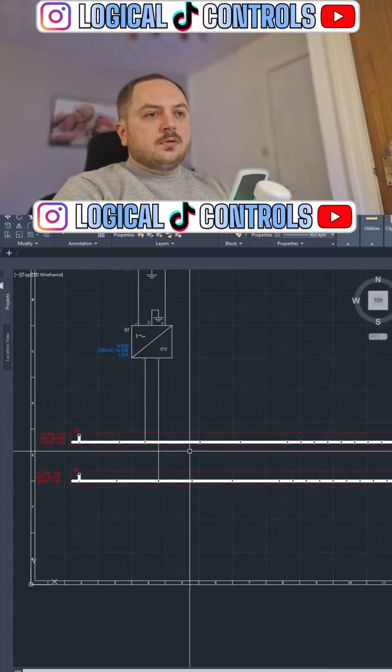You know the software, you're an electrician, but you're wondering what's the drawing for. I'm just really gonna show AutoCAD Electrical, really. The bits that are already there were when I was gonna draw up my test rigs that I've got. I never ended up doing it in the end, but this is what remains, really. So I was just gonna show some stuff, if you're interested.

What's the difference between TinyCAD and AutoCAD? I'm not sure, to be fair, Bubbles. I've never used TinyCAD. This is a special subset of AutoCAD called AutoCAD Electrical, so it's tailored for making panels and that sort of thing.

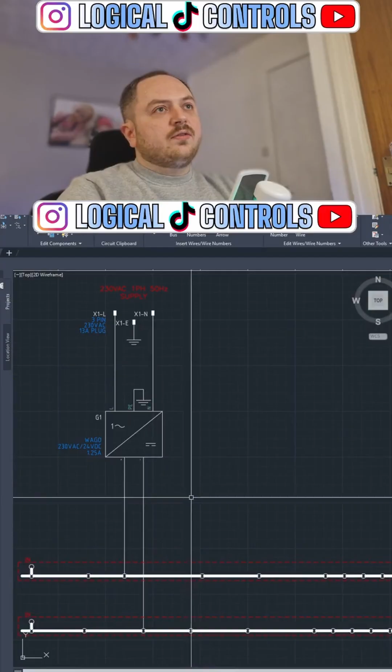Oh, you were working, yeah. It's a nightmare when it's like that, isn't it? All from the 80s. A P2000. What's one of them? I'm not sure what a P2000 is, Pickle. Did you have drawings, though? That's the most important thing. Well, I guess if you ain't got wire numbers and no labels and nothing, drawings are probably no good. Yeah, it's tough work. But that's where you earn your cash, in here. That's where you earn the money.

Automation Direct. Okay. Yeah, we don't really have that over here. I don't know if it was you I was saying it to or someone else, but I was looking to get a Click PLC one time, but they're just not a thing over in the UK. Earth the 0 volts. On the DC side, you mean? Yeah, I probably would. If I was doing a job, I would ground the battery negative. Yeah, it's probably the best way, mate. I'm in the UK, buddy. Them shipping costs would be expensive, mate.

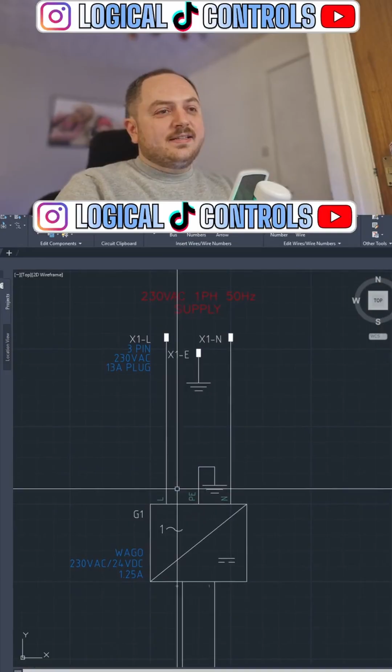Yeah, I know what you're saying, Powelly. I tend to work in power generation, so the battery negative is always connected to the engine chassis and stuff anyway. You always ground all that side.

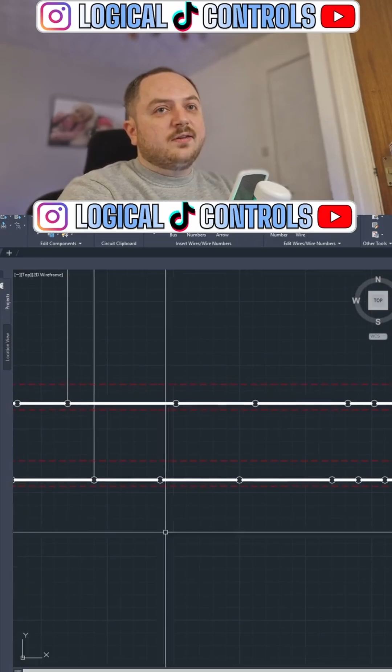High voltage. Yeah, man. I used to test industrial battery chargers, and sometimes the charger would have a floating output, and that was actually quite safe when you were doing the testing because you could have one fault and nothing would happen. If the negative faulted to the chassis or the positive faulted to the chassis, it didn't really matter because it was a floating system. But if you had two faults, if both faulted to the chassis, then you'd obviously have a short circuit.

Right, let me just start wiring in some stuff. How I would normally do it is, there's my positive. All my terminals are not aligned with the grid, and that really annoys me. Is that aligned now? I think it is, yeah. Let's move that one over. There we go. I like to try and keep my positives on the left, my negatives on the right. Try and keep some consistency across the drawings.

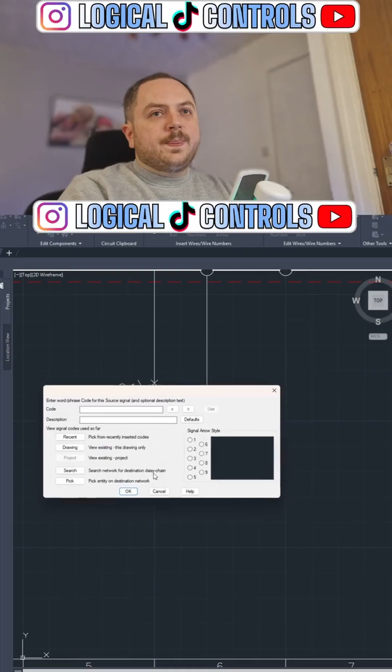Have you ever worked on larger scale buildings? Is that what you meant to say? No, I tend to do just the control panel side, but sometimes we might have like 20 control panels in a suite of the control systems, like a suite of panels. So I don't do buildings or anything like that though. It's usually control panels for like generators and stuff like that. Yeah, no worries, mate.

I want another source. Let's call this one negative. You can kind of call it what you want. I'll just show you what the source arrows can do in AutoCAD. So this won't really make sense to do this. In reality, you would normally do it across 2 different drawings, but I can draw some lines up here. You see that alright? Yeah.

And then I can put some destination arrows in rather than source arrows. And if I call that one positive, and call that one negative, and it depends how you've set out how you want your drawings to be numbered and stuff. But you see now those arrows automatically point up here. So if I put some wire numbers, let's say if I put the number 6 on there, so that's now got the wire number 6. If I update this destination arrow, that also has the number 6.

Oh, you haven't got that far yet. Oh, fair enough, mate. Fair enough.

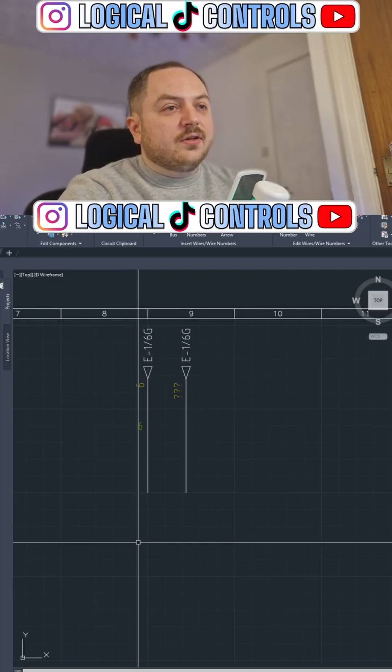Have you worked in anything related to GNC, AOCS control in spacecraft? No, mate, that sounds way above my pay grade. No, I haven't, buddy. Is that what you do? I used to be an electrical engineer, but now I'm morbidly obese and I live on a dirty mattress. I mean, days can get better, buddy. Get back into it.

I want to move from the USA to England. Is it worth it for controls? No, I would say you definitely get paid more in the US, mate. Just from what I see on TikTok and stuff. It sounds like you guys over there get paid way more.

Anyway, let me not just have you staring at a static screen. Let's put in some relays or something. What do we want to do? Let's bring in some coils. How do I want to do this? Let's put it here. Just leave it as K1 and leave it unlabeled for now. So I kind of showed this as an example, but it's not a very good example. We would normally, in the UK or Europe at least, do our rails horizontally rather than vertically.

So if I just delete that off, you guys can see that okay. Yeah, put my rail there for the positive, scoot that along, chuck that up there. Excuse me. That's negative, I know that one.

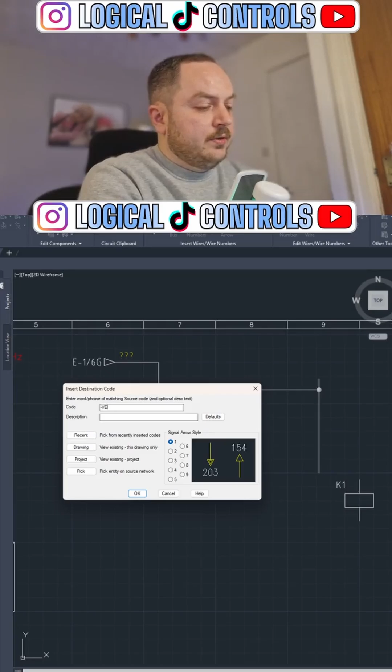70 plus pumps, wow. Savage, the engineer, savage. What was your pathway to becoming an EE? So I did an electrical apprenticeship at a local manufacturing company. That was a 5-year-long apprenticeship where I worked on the tools 4 days a week and went to college and university and stuff 1 day a week.

What's this panel for again? There is no real reason for this panel.

I was explaining at the start that I had basically a power supply and a couple of distribution blocks already drawn up, and that was because I was gonna do some drawings for my test rigs that I've got. I never ended up doing it in the end, so yeah, there's no real tangible reason for doing this. I just wanted to show off AutoCAD Electrical. I showed the 3D modelling side last night, that went down pretty well, so I thought I'd do the electrical side, the schematic side, tonight. It's only going to be a quick one.

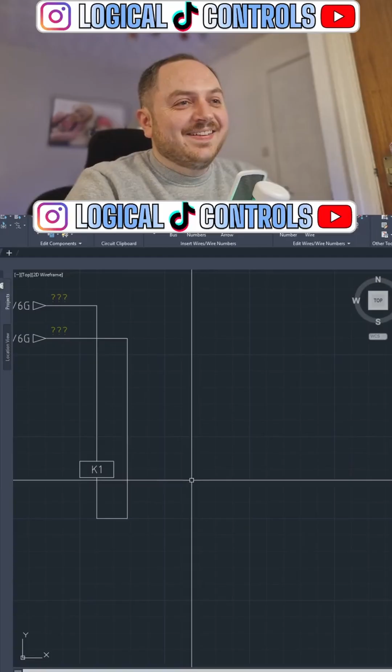Is it like a formation in autumn? I don't know what that means. Sorry, MN, I'm not sure what you're asking there. Air conditioning system, maybe I've missed something. Just let it burn. AC control, maybe I missed something. Desvad, welcome back. Anyway, mate, welcome back again.

I built panels for my father when I was 13, that's how I got into controls. Ah, nice, what sort of panels were you building? What sort of industry did you work in?

I don't know how much you guys can see of this screen. Yeah, you can see a little bit. So, how I would normally do my circuits is I'd normally have like a DC rail, which is what this is, so just ignore this down here, that was just there already really. But so these arrows point to these arrows up here, you see that number 6? That is this number 6 here. So it all automatically sorts itself out when I put the arrows in.

I could give this one a wire number as well. Let's give that number 2. Let's change the number 6 to a number 1, just so it's how I would usually have it. Positives 1, negatives 2, and then if I update that and update that, you can see it goes to 1 and 2.

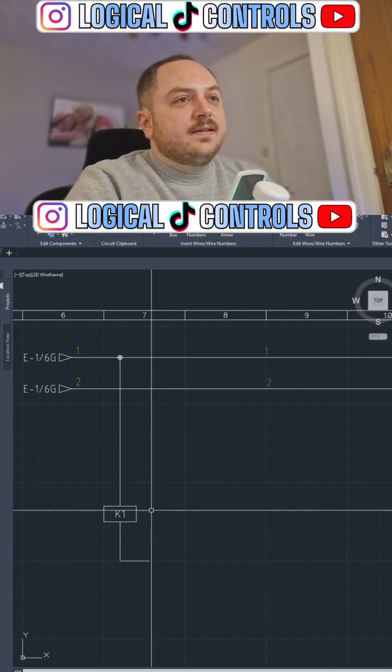Just found you, bro, can't wait to dive into your catalogue. Yeah man, I've got a lot of videos up there, you'll be there a long time, but thank you brother, I really appreciate that. Where are you in the UK? North Yorkshire, mate, North Yorkshire.

One line above, one line above, and one under. I have no idea what you're talking about there, buddy. Just pure automation drives, pneumatic valves, servos. There's probably some conversations going on that I'm not sure about. AutoCAD Electrical, yes mate, that's what it is.

Okay, so I've got a relay on there. I mean, it looks odd, but you could probably do this and have this as like a DC supply healthy relay, and with the relays I use, that's normally 8 and 1 on the coil. So these numbers down here are the coil numbers, and then up here is where you select the contacts. Normally I would use that, don't remember the pin numbers off the top of my head, I normally just copy and paste them across.

But just for the sake of this, I will say we have a 3 is a changeover contact. Let's call them 11 and 12. No, sorry, 11, 14 and 12, because the order is common, normally open, normally closed. And then put colon in, 3, 21, 24 and 22. Don't know why I struggled with that there, but yeah. The actual relays that I use aren't like that, to be fair.

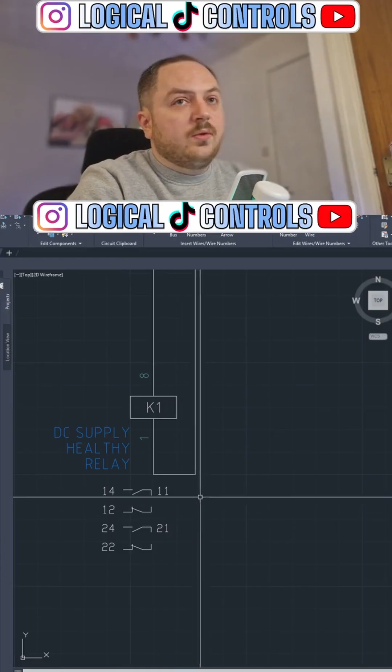Why have I only got 1? Have I done something wrong? 3, 21, 24, 22, not sure. It should show 2. Oh, there we go, it's showing 2 now. So these are what's called a cross-reference. So if I put a contact in, it's going to automatically fill in where that contact is, on which drawing and which grid number. See, like there's a grid, so if you're ever looking for the contacts of that K1 coil, it will tell you down here.

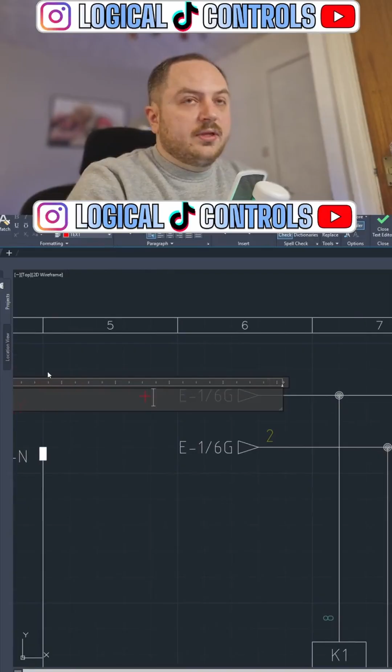In German drawing schematics like that, plus is above, minus is under. Normally I'd only use these arrows when going to a different drawing, but rather than chopping and changing between drawings, I'll show you on the same one. I'd always label which one's which - a label saying positive and negative. So even though it's on the same drawing, you can clearly see number 1 is the positive and number 2 is the negative. I always try to label it so whichever drawing you're looking at, you know which rail is which.

Do you design circuits for the public? I'm not sure what you mean by that, mate. I work for a company - we design control panels. They're not really for the public, I guess, they're for our clients.

Good software - are you building any specific circuit or just showing the process? No, I'm just showing the process, wide angle guy. I'm not building anything specific.

Right, okay, so there's our DC healthy relay. What we could do using that relay is take a line down. I can open up my components - I'll just pull it over here because there's some stuff I'd rather not show.

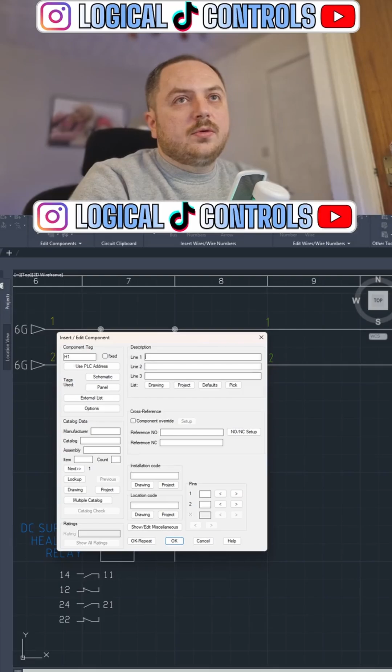Pilot lights, standard lights - let's have a nice white light. So what we can say is this is the DC healthy lamp. Normally has the terminals of X1 and X2. Let's scoot it up a little bit.

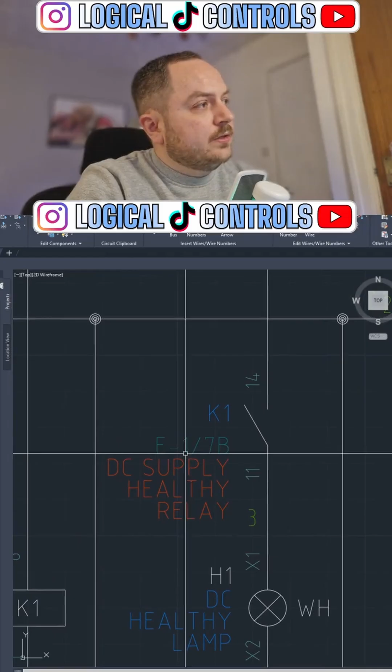It's also got the cross reference of where the coil is, in green - I think you guys can see that, yep. That's where the coil can be found. And on the other end, when you're looking at the coil, if you want to find the contact, that's here. You can see where the E1 is next to the 11 and 14 - that's telling you the normally open contact is at this destination.

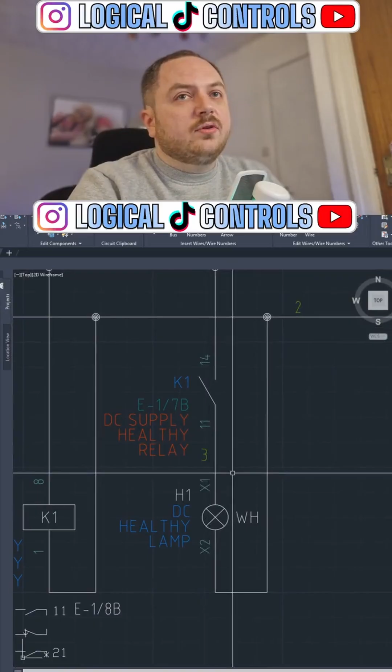Also, when I put the contact in, you might notice there's a number 3 here - it automatically put a wire number in for that, the bit in between. So yeah, that's pretty good.

SEE Electrical is good, I tried SEE Electrical, I couldn't get on with it, I didn't like it. It also failed on the first project where we trialed it. Our customer wanted our drawings, so we sent them - they had SEE Electrical, but it turned out they had SEE Electrical Professional or something like that, and we just had normal SEE Electrical, and the two weren't compatible.

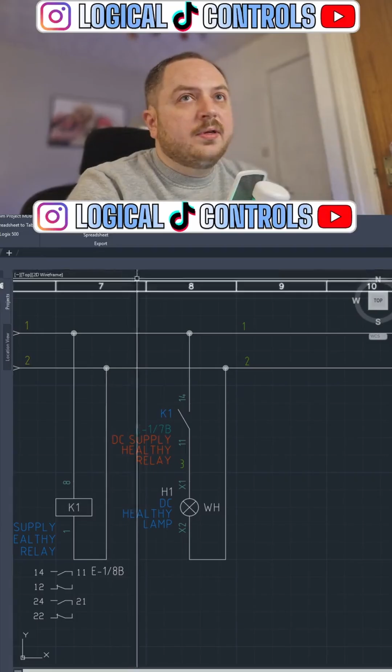How do you import a PLC in AutoCAD? There are ways of doing it, though I can't really show you since my ribbon isn't visible. You can do it from an Excel spreadsheet for certain PLC types, or from Unity Pro, an old Schneider software, or RS Logix 500. A lot of these are old, but you can import add-ons in AutoCAD to do that.

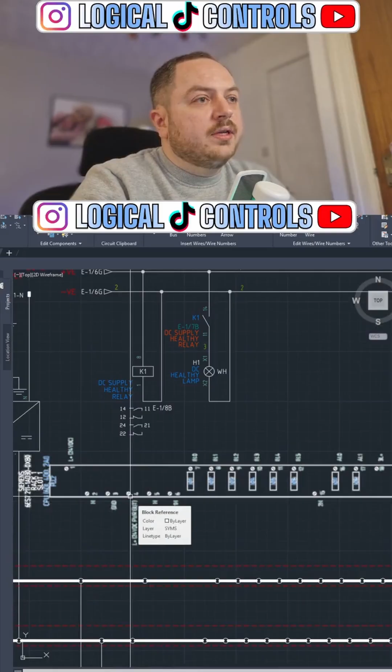Probably missed some stuff - how do you go about remote VPN access to a PLC? I used to work on roller coaster control systems, and I'm doing that at the moment actually. I've got a project where I'm using a Teltonika unit, a RUT 956. It's pretty good, I'm quite happy with how it's working.

Just build your own isometric PLC - you could do that, but then you're kind of getting around the point. The whole purpose of doing it like this is to use AutoCAD Electrical's inbuilt functions, so it's all kind of intelligent. If I was to just draw it out, it's kind of pointless being in AutoCAD Electrical at that point, I'd say.

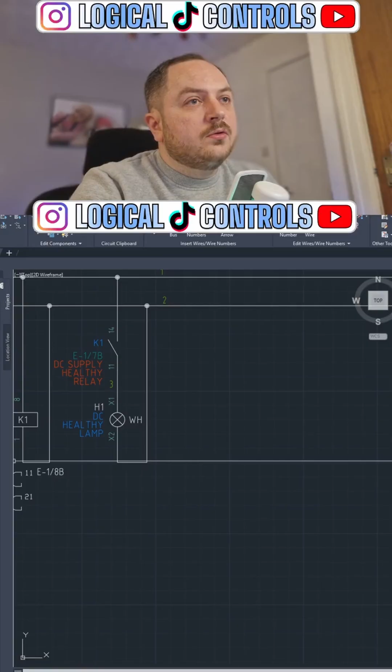VPN access was a risky topic. Yeah, I mean, if you get a device that's got all the cybersecurity stuff built in, then you should be golden, really. I used the Teltonika, but stopped using the RMS VPN. Oh, that's what I've been using. Yeah, the RMS VPN stuff. It was pretty straightforward to set up. I'm quite happy with it. It didn't cost a lot whatsoever for like 10 years, like a management pack thing. It would also flag an input on the PLC.

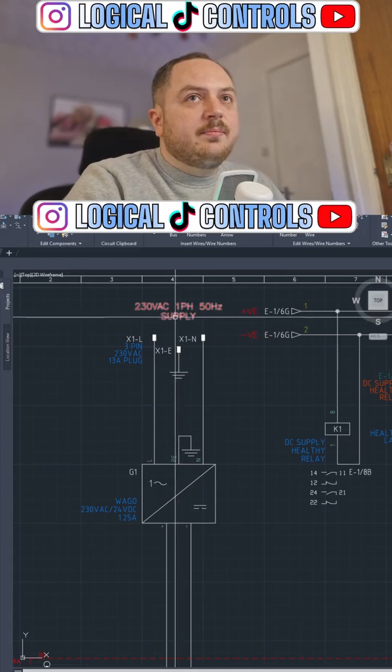So we've put in a relay. Right, okay, let's go back to basics. We've got an AC input. Single phase in the UK, the supply at the wall is 230 volts, 50 hertz. That comes into a power supply. It says it's a Wago or Vago, however you want to pronounce it. 230 volt to 24 volt DC, 1.25 amp. I picked that just because that was what was going to be on my test rig.

It then comes down to a couple of distribution blocks. Normally I wouldn't have green and white. I would have something like orange and white, but I don't have an orange one. I have a green one, so that's what it's going to be. These distribution blocks, they're a Phoenix distribution block. They're really good. 19-way, 24 amp. Brilliant for just distributing some DC about.

We come then down into a circuit breaker rated at 4 amps. That then goes off into these source arrows. Those source arrows come out up here and then go into a relay, which is my DC supply healthy relay. That then goes to a lamp. So if that relay is energized, that contact's closed, that lamp's turned on. That's all we've got to so far.

Hey bud, I'm about to create a coil winding machine. Would you recommend this tech for this? I wouldn't say go out and get it unless you're doing control panels or anything electrical, because this software isn't just for control panels, you can do anything with it really. I would say if you're not using it already, don't go out and get it just for one job. Go out and get it if you're going to do tons of panels or tons of machines. Don't just get it for one project because it's really expensive.

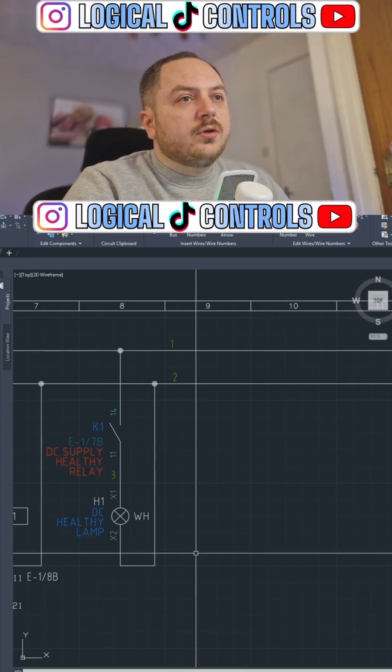Powering the modem would flag a PLC input, thus logging that VPN is possible. Ah, I'm with you. Sorry, right, I'm with you. Okay, mate. When active, the manufacturer takes no responsibility for the loss of life on the ride. That's wild. I don't think that's going to hold up in court, mate.

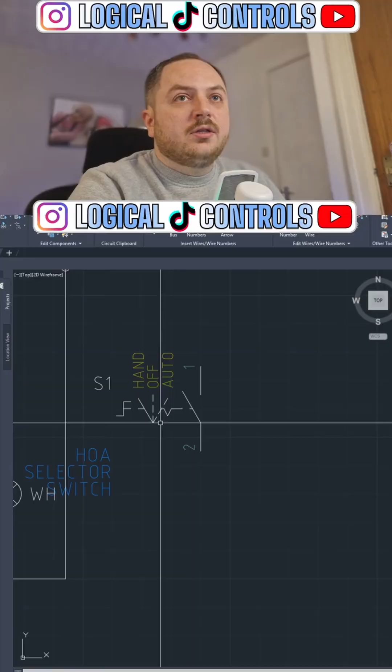Positions: hand, off, auto. What that does is it gives you a little visual representation of what that switch is. So the left hand position would be hand, the middle would be off, and the right would be auto. It's been given the designation of S1, and it's got a little bit of a description here, which I can just shift across. The descriptions are never really where I want them. It's typical. And I can put that there.

Then if I need my other contacts, which I do want, I'll pull that over here. Selector switches. Second contact normally open. Put that one there. I'll just copy that across. And then there's a little button where I can click that one and that one, and it'll give me a nice little line in between. I can make that 11 and... In fact, I've just realised I put 1 and 2, I think. It should be 1 and 4.

In fact, it wants to be 11 and 14.

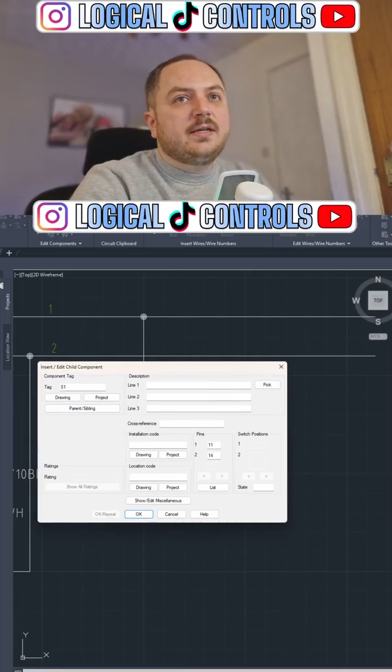I'm getting distracted, sorry. Do you train? As in, do I teach and stuff like that? I don't, no. I just do this for the fun of it, because I'm a boring bastard. Yeah, I don't do any formal teaching or stuff like that. I don't want the hassle of it.

You guys can see that, okay? Right, so there's my selector switch. There's my contacts on my selector switch. I can then bring that down to, again, some relays or something. I don't really need a contact in the middle. Probably don't need to use that. Let's bring in... I tend to just copy and paste, because once I've set it up how I kind of want it, then I don't need to start messing around again. Oh, I've missed out there.

I'll tell you what as well, I shouldn't have the gripper on. Just so you know what I'm talking about, you can see there's like a little green, it almost looks like an egg timer where my mouse is. And if I go to the end, it'll turn to a square. You don't really want that on when you're working with AutoCAD Electrical, because AutoCAD Electrical is meant to be used with like a grid type thing. So yeah, don't put the snapping. I can't remember what the official name is, but I call it the snap. I think it is object snap or something.

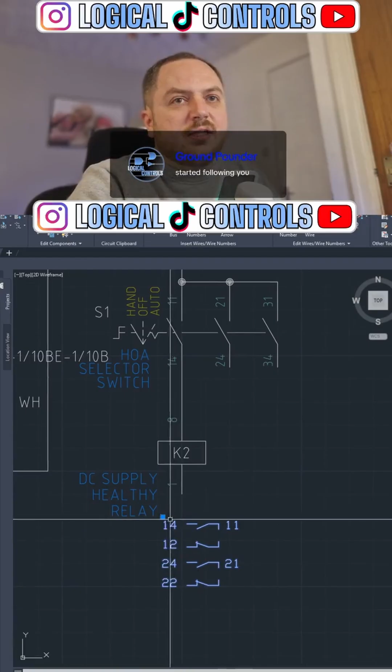Really appreciate that. Grew up watching my dad draw these on an easel. I feel like I'm so lucky to live in a time where I don't have to hand draw, because I know for a fact, with the amount of mistakes I make in AutoCAD Electrical, and it's so easy to fix. If I was to do it by hand, I don't think I would be in the industry long. I'd have thrown the big drawing boards out the window long before I did anything useful. Because them guys had to, like, yeah. If you made too many mistakes, you almost have to start again completely from scratch.

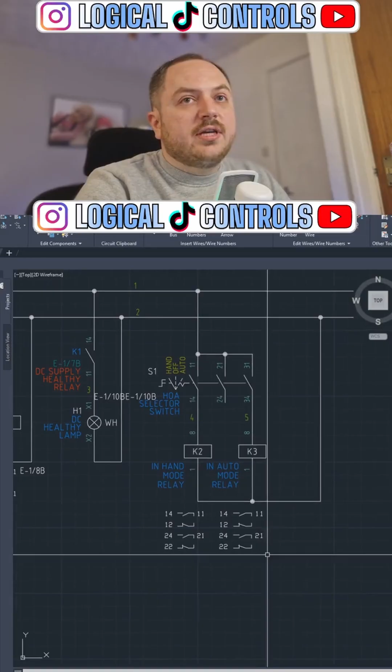So there's another wire that needs a number. Just click on that, it gives it the number 5. That one also needs its name changing. So this is in hand mode relay. And I tend to just try and stick with 2-pole relays. They're quite small. The ones I use are Omron G2R2 relays. I try and use them for everything. But if I need some bigger current, there's like a G2R1 which does 10 amps. These are 2-pole 5 amp relays. So there's that.

What else can I show? Let's go into another circuit now. I don't know what's going on with that cross-reference. I think it's because I just need to pull that off. Let's just cancel that. Take that out. Hopefully that should get rid of... Yeah, that got rid of the cross-reference. Let's go into another drawing. So, not destination. I want a source.

You're using AutoCAD? I am, buddy. Yes, I am, DJ. Let's call this +2 because the last one was +1. In fact, let's put a dash in there. You can kind of name these whatever you want. It really doesn't matter as long as the other side's named the same. Yeah, this is just how I do it. +2, -2, whatever. So that's now pointing off to somewhere, but I haven't done the other end yet.

And if I go into a different drawing, so this is a totally blank drawing, I can now do, let's do a multiple bus this time. So up until now, I've been individually putting the wires on. You can put multiple wires on at the same time.

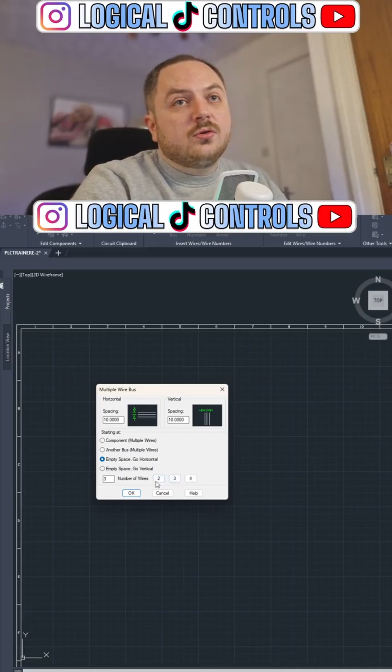Really appreciate that. I want an empty space, go horizontal. I just want 2 wires. You could do like tons of wires if you wanted. I will set it there, and I think you guys can see that I've just made a 2-wire bus, put some destination arrows in, call this --2, and you see that's now, in fact that's positive because it's on the top, my bad.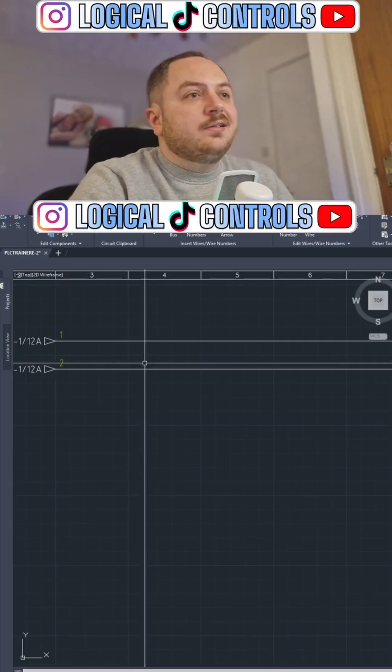What shall we do? The thing is, I'm not really designing anything as such. I'm just trying to show you how the software works. Let's pull this down. Let's say if we are in hand mode. So what I want to do is bring a contact in and, before I do that, what I did last time to link the contacts to the coils was parent sibling, but that's only good if the coil's on the same drawing. We're now on a different drawing. We're on E2 instead of E1.

So now what I need to do is go on project, and project will list every relay coil you have. So what I want to do is just pick the one that I want for this contact, which is in hand mode. Hopefully you guys can see that okay. And I pick that, and it brings in all the details like it did before. It brings in the tag number of the coil, the location of the coil, and the description of the coil. So if I went back to E1, they were a bit close, but you can see this cross-reference is updated. So that's now telling me where the normally open contact is.

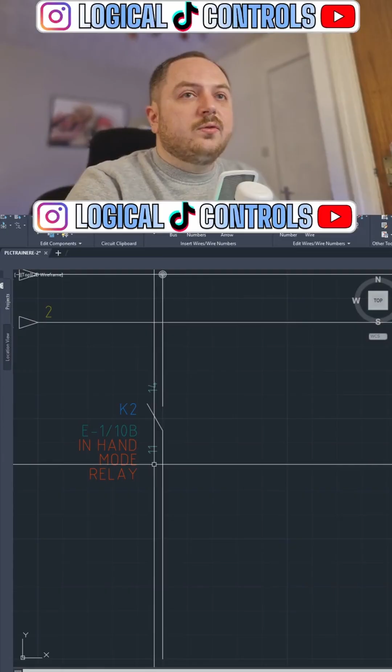Yeah, and that's it really. So this is all automatic in the background. I'm not having to do anything. I'm not having to manually cross-reference, because manual cross-referencing, I don't know if any of you have done that, but it's a total nightmare, especially if you need to modify the panel or modify the drawings in any way after they're done. Having to update the cross-referencing manually is crazy hard. It's more of a pain than hard.

How do you create a bespoke drawing border? That's a whole different topic. There's a whole load that goes into that. It's called a title block. Have a Google if you're looking to do your own. Yeah, look into title blocks.

Is this free software or subscription? This is subscription-based software, AutoCAD. I don't think you can buy it outright anymore. I'm not sure on that, but nowadays they're pushing for subscriptions, and it's like a couple of thousand dollars a year. It's pretty expensive. Which one is better, ePlan or AutoCAD Electrical? I haven't used ePlan, mate, so I'm not sure, to be fair.

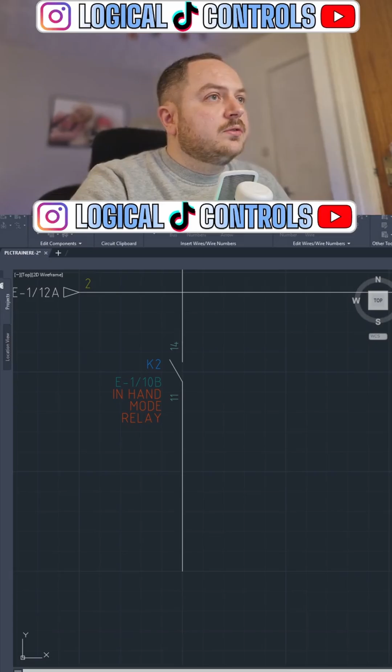Okay, so if we're in hand mode, I'm going to do a little circuit. This is an enabler for my hand circuit, for my manual circuit. So I'm going to put some push buttons in. Let me just pull that over here a second, find my push buttons. Push buttons, normally open. I don't know if we've got any guys from outside Europe here, but these symbols that I'm using are IEC symbols rather than NEMA symbols, so that's why they might look a little bit different for you.

I'm going to call this my start button. Let's put it there. Start button. Give that 11 and 14. And what I've kind of glossed over is you can put all the manufacturer data in. You don't even have to put it in. There's a database already that comes with AutoCAD where you can pick a particular type of button. It's got all different manufacturers: Eaton, ABB, Schneider, all the others.

And you can give it data. I won't do that on this stream because it's unnecessary, but you can do all that, and then it can give you a bill of materials at the end. So when you finish all your drawings, you can create a report, and it will give you every component that you've used in that panel, or that machine, whatever you're designing. And then you could take that and go and order parts and stuff like that.

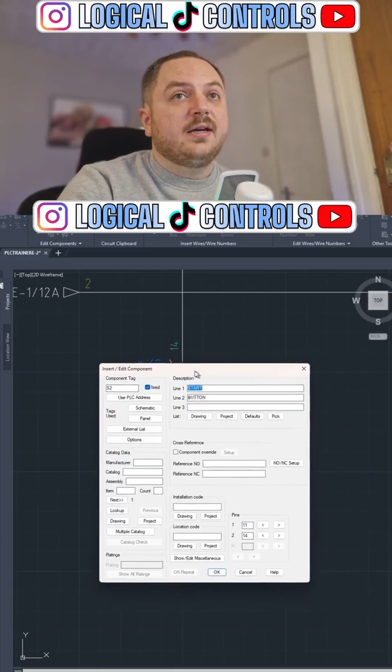If you're a student or have access to a student email, you can access Autodesk products. Worth a look. That's right, Alex, thank you for reminding me of that. I did mention that last night. If you have a student email, you can get access to AutoCAD. I did it myself when I was a student. I think at the time they would give you access to basically any AutoCAD product for 3 years. I don't know if it's still like that now, but I think it's something similar.

ePlan has its own advantage. Yeah, I think ePlan, as far as I'm aware, is just as good, if not better, than AutoCAD Electrical. It seems to be the way a lot of people in the industry are going.

So there's my start button. I also want a stop button. Let's make that normally closed. Push buttons. Normally there would be images on all those components that you've seen on that list. For whatever reason, my installation has decided not to bring those in. I think it's something to do with the database that I've got in the background. It is what it is. I know where most stuff is anyway. So this is my stop button.

If I could spell, which I obviously can't. There we go. Let's call that 1112. Start button, stop button. Oh, let's bring that up.

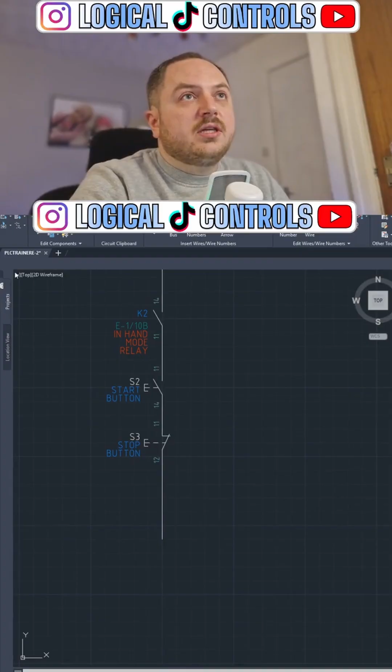Let's add another. In fact, let's put a contactor in this time. So, relays. In fact, it's not. It's called motor control. There we go. Motor control. Motor starter, they're called, and a coil. Let's leave this as K4. Normally, actually, I don't call stuff K1, K2, K3, K4, because sometimes I just don't find it very intuitive if you're looking at a circuit.

So if I was doing, I don't know, a pump run contactor or something, I'd call it PRC. Yeah, that's how I tend to actually label. But I'll just leave it as K4 for now, just for the purposes of the stream. Let's call this motor run contactor or something. And the coil is normally A1 and A2 on a contactor.

And we would have, let's say it's a 3-pole contactor. We've got 3 normally open contacts. I think normally open is a 1. It is. We'll call that 1 and 2, which is normally what it is. 1, 3 and 4. And, in fact it's not the final one, but 1, 5 and 6. And then lastly, you normally get an auxiliary, so that'd be 1, 11 and 14.

Again, like I say, if you've selected a manufacturer and stuff for your contactor or your relay, it pre-fills all this in for you. You don't have to do all this because it's got the data in the background in the database. So I'm just doing it because I haven't filled all that in. And then with those numbers I just typed in, it now knows what the contacts are. So it's a 3-pole contactor with 1 auxiliary normally open contact.

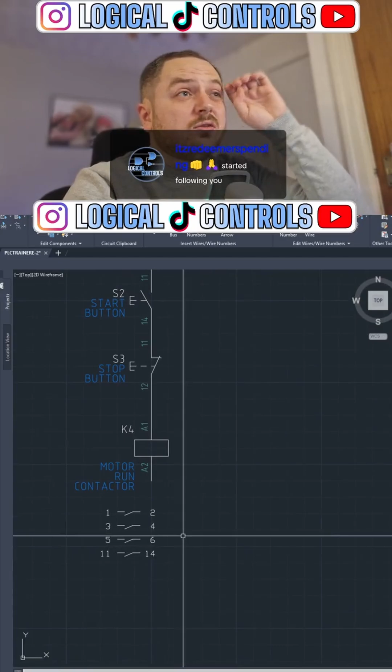Okay, so there's in auto mode, start button, stop button, but as well as that, I want a latch for that contactor. And because it's the same drawing, I can just do parent sibling. It's telling me you've copied a relay contact, but this is a contactor coil. You need to change the database name in the background, the type of contact it is, which is fine. I'm doing things a bit fast. Sorry guys, I'll slow down.

When that contact came in there, it came in with a pin number of 1 and 2, but 1 and 2 is one of the main poles, and I don't want to use the main pole for doing the latch. I want to use the auxiliary contact. So because I already put in the data of the contacts, it already knows what numbers are what. I can click list here, and it gives me a list of what contacts are available for that contactor. So I want 11 and 14 because that's the auxiliary contact. And for whatever reason, I've got object snap on again. It keeps coming on. Turn that off.

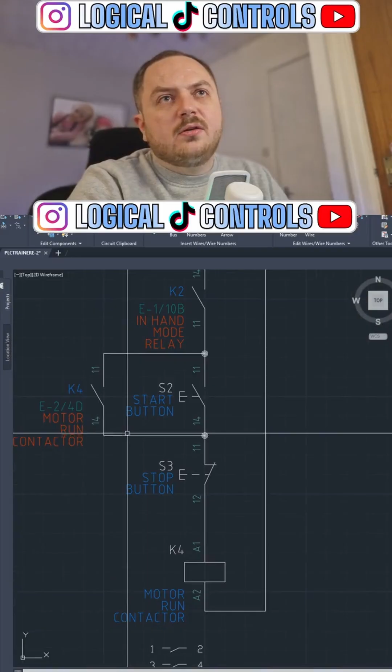Right, so there we go. Put that over there. Put that over there. And there's my latch. Kind of looks a bit funny. I think I've gone a bit too high there. Let me scoot that down one. There we go. Okay, so there's basically our manual start circuit.

It hasn't got any wire numbers yet, so I've got two choices. I can either do a project wide, add wire numbers, or I can select the wires that I want numbers to. Just for the sake of it, I'll do project wide. Sequential. Let's just go for it. Do all.

Save. Okay, I don't normally do this, I normally pick them individually. But there you go, it's added some numbers. The reason I normally do it individually is because they're not the right numbers, they're not sequential to what I did last. They were new numbers because this is a new circuit, it's added a 1 to the front of the number. So let me just do it individually, I prefer to do it that way anyway.

And again, it's done it a bit weird. Why is that? Everything's gone Pete Tong. What's happened here? Let me close. There we go. Oh no, it is, we're up to... I didn't realise we're up to wire 11. Okay, never mind, ignore me.

Hopefully everyone's following along. If you're not following along, just ask a question.

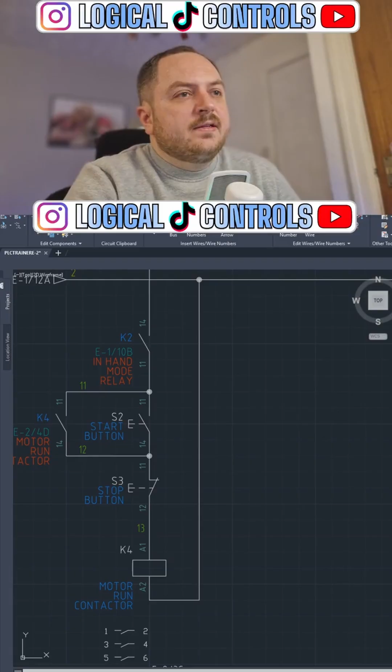Is this similar to ETAP? I don't think so, I've not used ETAP, but I think that's more for like calculations and stuff like that. Am I not right in thinking that's for calculations? That doesn't look like Xilinx, that is. You are correct in saying it doesn't look like Xilinx, because it isn't.

Why not the stop button at the beginning? I know a lot of people are taught to do it that way, but it doesn't matter whatsoever. I don't like doing it that way personally, that's just my personal preference. I like all the triggers for starting, like latching up or starting a circuit, to be at the front, and I like all the ones that basically break that in a chain afterwards. That's just my personal preference. I remember when I was at college and university, everyone always said put the stops at the start, but yeah, I'm not a fan of it.

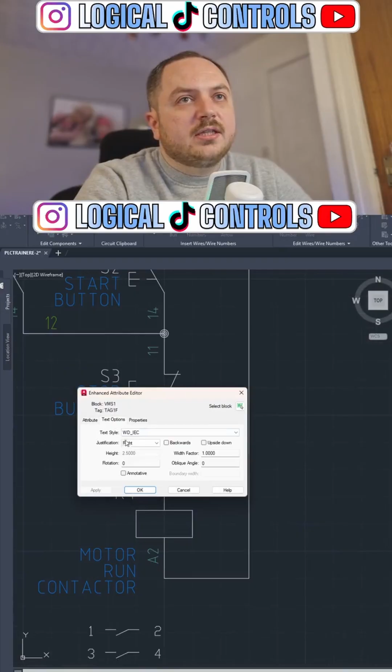Yeah, so that's my... I like to also put the tags of the coils inside the coil. So I'll align the text to middle center, and then I'll just snap it into the middle. So I like to have the tag of it inside.

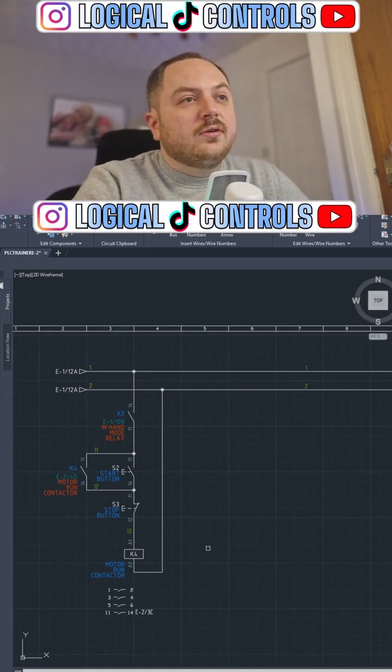John Spathgate - I feel like I recognise that name. Maybe that was the guy that showed us it. That might have been, I feel like it is, because it's quite a unique surname. I think that was the guy who showed us.

What's better? I personally prefer this, but like I say, that did definitely have cool features, but you had to pay 3 times more to unlock everything.

Do you do anything with Allen Bradley? I don't, to be fair, mate. We build panels for a particular customer who uses Allen Bradley, but we don't program them. It's a bit of a strange arrangement we've got - we don't do that with many customers. We don't just do panel builds, we tend to program whatever we build and design. These guys get us to do the design and the build, but then they'll program it. It works out pretty well, but they use Allen Bradley - I wouldn't do it by choice. Did you ever use SolidWorks Electrical?

No, but my last company where I worked, they were going to move on to that. So we used just normal AutoCAD, generic AutoCAD, not AutoCAD Electrical there. But they used SolidWorks for the 3D modelling and stuff, so then we were going to shift over to SolidWorks Electrical, but I'd left before we did any of that.

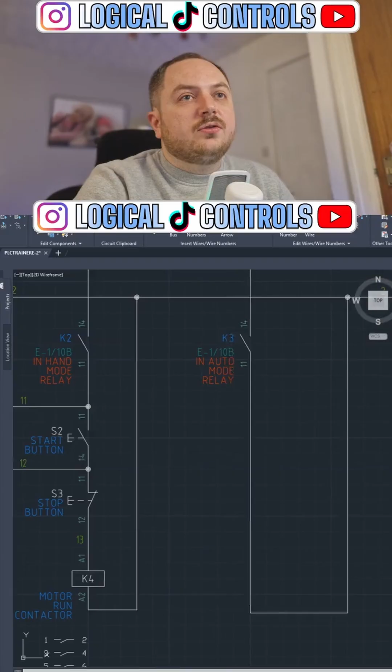Thinking of moving over to AutoCAD - AutoCAD's good, it is good mate. It probably, I say it's good, and I'm showing you - this is a very typical thing. I'm showing you all this stuff that looks cool and looks dead easy. I've been restricted for 10 minutes, I don't know why, I've been moving my screen. I've been showing you it and it looks dead easy, I guess, but I use this every day, so it will take a little while to get used to, I would think.

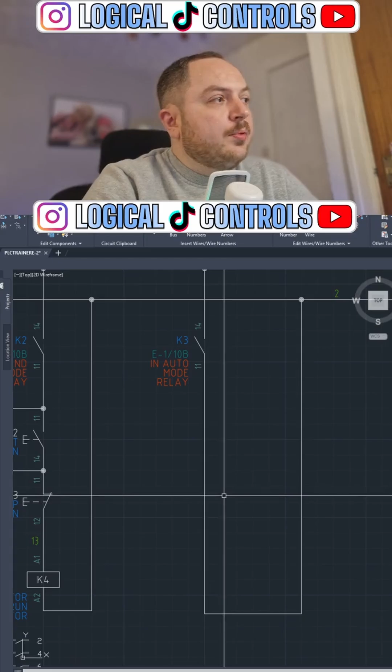Do you do tutorials for complete beginners? I don't, mate, I don't really do tutorials and stuff. I just kind of hop on lives and show whatever I think might be interesting. I'll occasionally do a video, I haven't done a proper video for ages, I need to get back into it. I've just been kind of clipping the lives, really. So no, unfortunately I don't - I just don't really have time for that sort of thing.

I'm a multi-skilled maintenance apprentice, I'm in my 4th year, coming out my time soon. Congratulations, mate, it's a bit of a slog doing your apprenticeship, but you're coming to the light at the end of the tunnel. You'll soon be on the big bucks, hopefully.

Do you build these block templates pre-build? So no, the coils and the switches and the relay contacts and stuff, they're all built in - AutoCAD has its own library. You do have to build stuff though, it doesn't have everything, so you have to build your own on certain things.

I'm getting a dry throat with all this talking. So, just as an example, let me pull something in. Let's try and find something that you might know what it is, because we use a lot of stuff bespoke to my industry. Let me have a look - what have I got?

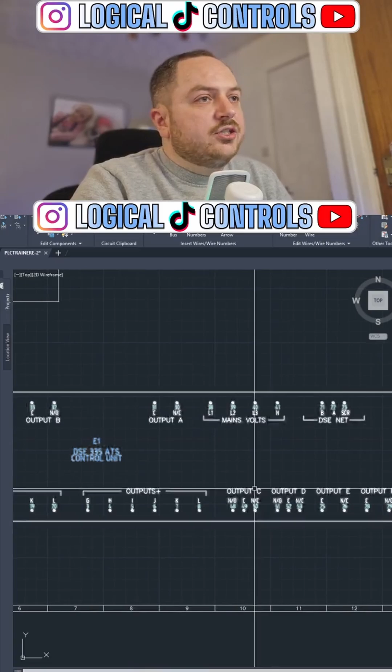None of you will probably know what this is, but this is a block that we've made. This is for a Deep Sea Electronics 335, which is an ATS controller. AutoCAD has no idea what one of them is, so we've had to make it ourselves, assign attributes to it, and basically get it to work within AutoCAD Electrical's automated system. So that's just an example. But this stuff, these are all built in, they come with the program.

Can you generate a parts list? You can, mate. As long as you assign, like I was saying, you might have missed this earlier, you get manufacturer data and catalog and all that stuff. As long as you assign that information, it will tell you how many of them you've used and that sort of thing.

I wonder if I can find something. The thing is, I never do it, so I don't really remember how. There we go, catalog stuff. You just get like, it knows it's a contactor. So you can go through and, yeah, I don't know what I've got installed, to be fair. I've only just got this PC. Maybe it's just Siemens, you can import other manufacturers and that sort of thing. But I can pick one of them, whatever one of them is. I'll click OK. That didn't work as how I thought it would.

Anyway, you can, I've definitely done it in the past. I don't do it a lot. Just kicking off. It's changed a load of stuff, it's made it a... okay, it has updated it. You see, whatever that contactor was that I picked, those are the contacts for it, I guess. Like I say, I don't tend to do it, but if you did do all that, then you can generate a BOM at the end.

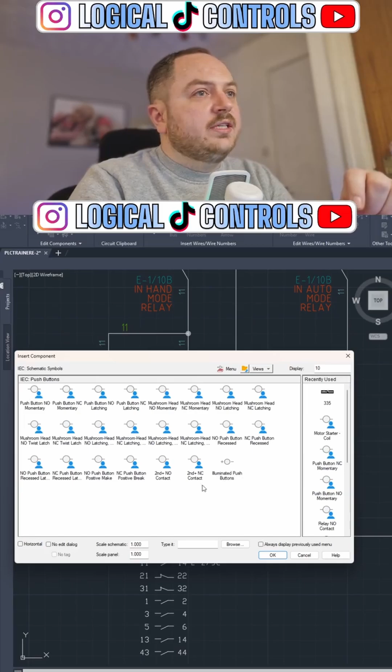Can you program PLC with AutoCAD Electrical? No, mate, no, this is just for design only. You would do your panel design with this software, you wouldn't do any programming or anything.

You know who, thank you. You've already answered him. Trevor, thank you for the follow. I don't know if I missed any others, probably not. Once you get restricted on TikTok, it's mad, you just drop half the viewers in a few minutes.

Each PLC has its own software. Mitsi is mainly used on GX, Siemens on TIA. That's right, RQ, yep, you're right, mate.

I don't use the catalogue because they never have what I'm looking for. No, that's the same with AutoCAD, to be fair. You can download something called a localizer, which will, depending on where you get your AutoCAD from, because normally you get them through a distributor, they'll have a localizer for the UK or Europe or whatever, and it'll have stuff more tailored to what you use, because AutoCAD's obviously an American software. It has a lot of American parts on, and a lot of that stuff just isn't available here.

Does anyone else hate how much Siemens update TIA, so when you're trying to sim you can't? I don't have that problem. I run mine on a VM, and I don't think I have my VM connected to the internet, so I don't have to deal with that problem.

The restriction is ridiculous. What's that in reference to with the engineer?

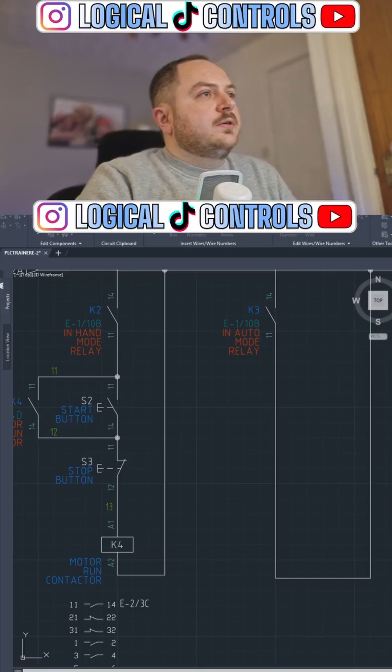Okay, so I know I get started rambling, and then I end up not doing what I'm supposed to be doing. So in auto mode, here you would have, I would take these to terminals or something. Where's my terminals? Wait a second, let me pull it across here. Terminals, there we go. Terminal with wire number, that's what I'm going to put in. So I can put a couple of terminals down, delete that wire out the middle, and basically them terminals is where you'd connect like an external float switch or whatever it is you're controlling.

You might also have another set of terminals for another float or something. What I would do in this case is get my text. Where's my text? I'll copy that across. You guys can see that okay. And I would put here something like 'start float' to let you know that's where the start float needs to be connected across these terminals.

Them terminals don't mean anything at the moment until I put wire numbers in. So I'll put a wire number there, wire number there, wire number. No, in fact, I don't need a wire number there. So across 14 and 15 is where I'd connect the start float. As well as that, with a terminal, I normally give it a tag strip, so I'd call it X1.

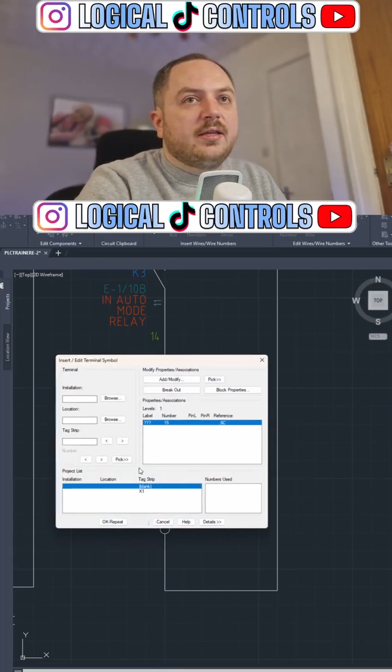And then that way it'd be X1 14, X1 15, and depends how you set up your panel, but then this might be X2 15, and X2 2. And I would say maybe that's where the stop float goes. This is just how I do it. I know other people do it differently. You might draw the contact and stuff like that.

Normally have to bodge a job because TIA won't update. Fair enough. Your live restriction. It's mad, isn't it? It's mad, Kay.

IS barrier. What are you asking him? Good evening, Professor Butler. How are you doing tonight, mate? Did I see that you'd mentioned me in something earlier? I had like a notification at the top of my screen for about 0.5 seconds, and then it disappeared, and I have no notification for it. So I have no idea what you either commented or mentioned or something. I've seen it earlier, but it went.

Is this software free? It's not, mate. No, this is actually quite an expensive software. This is AutoCAD Electrical. I must have turned grid off by accident. Yeah, unfortunately it's not. But an alternative might be SkyCAD or FreeCAD. They're two alternatives that I know of. Let's put that back because that's not good there.

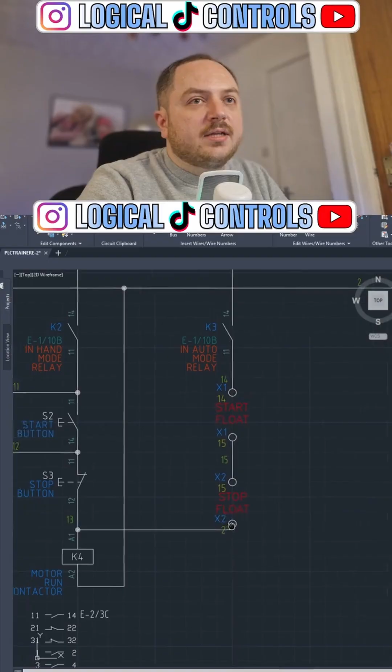You are right though. I do need it. It would need to be latched in some way, but you never know. It could be from like an intelligent device on the tank or something. A lot of tanks, at least a lot I've seen, have little Siemens logos on them and stuff, so it might be latched up in there. But then you wouldn't have a start and stop. So yeah, I'm just kind of making it up on the fly. There's no real thought gone into any of this. I'm kind of more showing the software than anything.

Oh yeah, cheers mate. Sometimes I just don't get notifications. The engineer, you commented on one of my videos the other day. It was can you program it to understand women or something you said. I've replied to that, but on my missus's phone, that reply just isn't there. TikTok's being a little bit weird at the minute. It was funny though. I tagged you in a comment in the video. Yeah, I don't know what's up. When I opened the app up, it was at the top for literally about half a second, and then it disappeared, and I went to my notifications, and it just wasn't there.

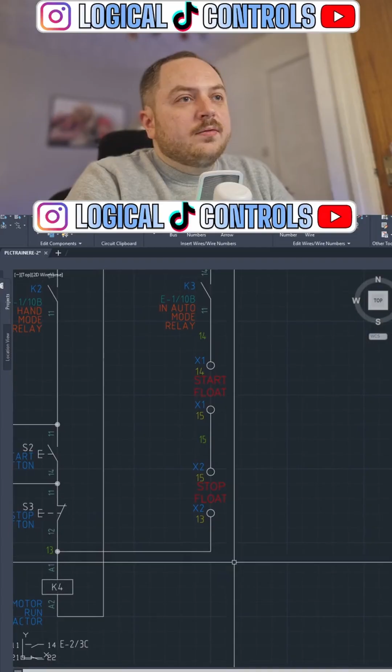AutoCAD is fairly expensive, but if you're a student, you can get it free. Yeah, that's right, RQ. I always forget to mention that. Someone else pointed that out as well earlier.

Oh, you can't see it either. I don't really remember what I said. It was something along the lines of not even God himself could do that or something. Yeah, I don't know. I get no notifications for certain things. I don't know what's going on.

But that comment is a bit weird, yeah. Anyway, let me carry on.

So, this was just an example showing you basically how these arrows work. So, they're the source arrows, they're the destination arrows. These numbers point to where they're going. So, drawing E1, 6G. There was a couple of relays, a lamp, some selector switches, some relays. Then that went across to the next drawing, which was E2, which is this one here. That's where they came in.

I've not labelled them up again, so let me just do that. So that's the positive, that's the negative. That's how I would normally do it. And then you can have the rest of your control circuits or whatever on here. I can bring that in a little bit, tidy it up a little bit. And then you can have this motor on.

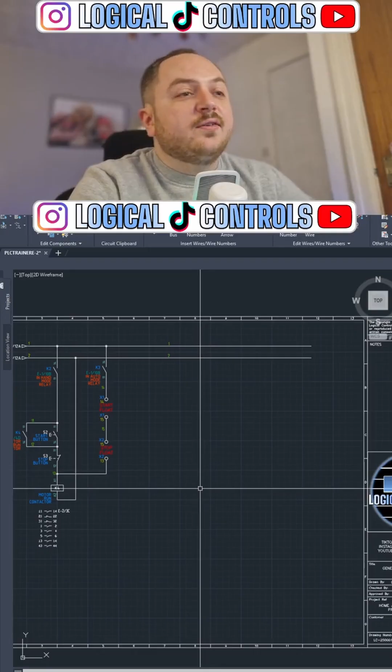Yeah, so... And then, have I got a drawing three? I'm not sure what's on this. Oh, this was just a load of messing around. A load of PLC parts. Let me bin them off. So let's have a drawing 3, and that could be the AC drawing. So, I know we haven't really got much on here, on this drawing. But we could take that then.

So this motor run contactor goes to another drawing. We'll do another multiple bus. This time we'll have 4 wires going horizontal. And then we'll have some terminals on there. Oh, and make them X3 actually as well.

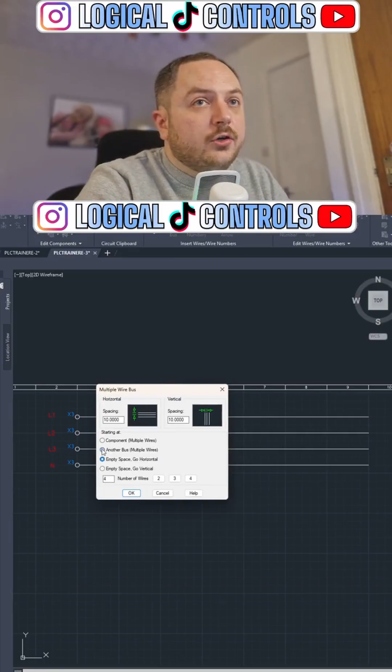Then off here, I can come down with another bus, it's called. And I can just pull that down, and it will pull them all down for me. And then I can put in... I'll bring this over here. Like I say, you would normally see actual symbols in this database thing. I've broke it somehow. Breakers.

And also, one weird thing about AutoCAD Electrical, it doesn't have any 4-pole circuit breakers. It has 3-pole circuit breakers. Let's say that's a 32 amp circuit breaker. And then you kind of just have to copy the last pole across. I want to bin that off, else I'll start getting weird cross references.

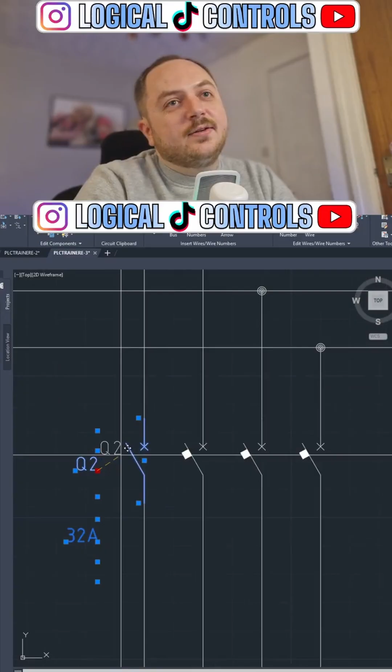Is there any freeware comparable to Allen Bradley that I could learn on? Yes, Codesys. Download Codesys. It's not totally comparable, but it is PLC programming software that is free and you can simulate on. Because Allen Bradley software is pretty expensive, just like Siemens. There are ways and means of getting Siemens software, although it's not recommended. I don't know how else to put that without getting in trouble. But yeah, I would say Codesys is your best bet, mate.

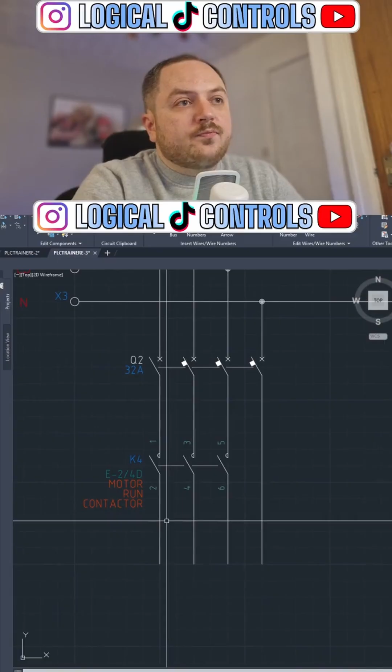We're going to tie that to the motor run contactor. So that should pre-fill all the information in. There we go. From the previous drawing. So now you'll see those contacts have numbers against them. Although it's saying E2. Let me just change that because that's not true. That's E3, that drawing. And now if I update here, oh, it's still not doing it. Hang on a sec.

My E3 drawing was labelled as E2, so it's got itself in a bit of a mess. But if I just re-add them, I think it should sort it out. I had 2 E2 drawings.

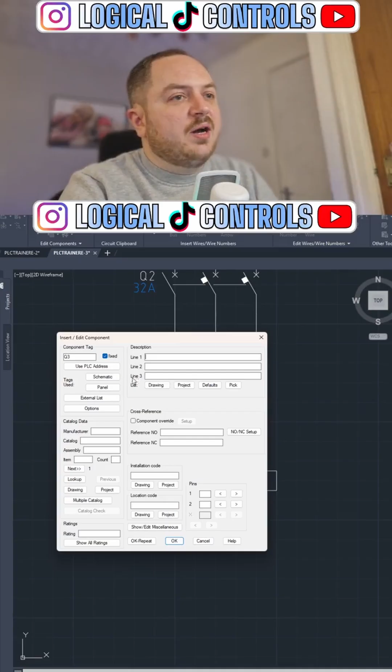Bro, that's beautiful. What's the software name? This is AutoCAD Electrical, mate. Hopefully I've answered a few of your questions there. That was the whole point of the title of the video. The title of this live was "What's the software name?" Because 95% of the time I'm having to repeat the same thing.

I'm gonna call this, I just call it motor overload.

Yeah, we're getting to the end now. I'm getting tired. I'm ready for bed. We've got work in the morning.

And let's take that to a motor. So let me find a motor now. 3-phase motor. Let's just chuck that in. I'll put that there. Just call it, I don't know, fan motor or whatever. I can't even remember what the control circuit was that we're doing now. I can bring that one. In fact, I don't need to do that. I could just extend that wire. And I'll bring that down to... No, wrong way. I want to put that on there. There we go. And put that on there.

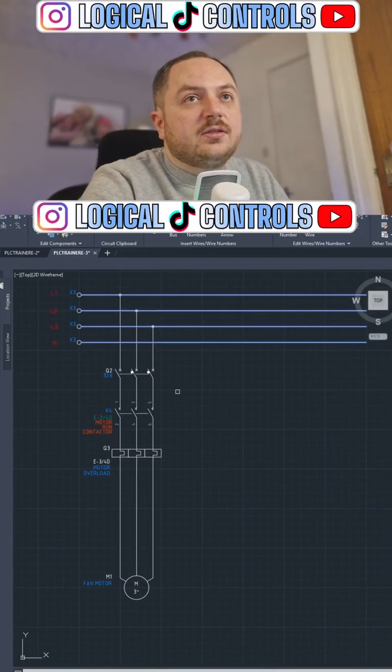We don't have any wire numbers yet, so let's add them quickly. Like I say, I always try and pick individual wires. In fact, this AC itself needs numbers. These need numbers. This bit in between needs numbers. And then this bit needs numbers. Can you all see that? Yep.

Who do you work for? I'm not going to say who I work for, to be fair, mate. I'm sure you're all great guys in here, but the internet could be a strange place. I'd rather just not say who I work for.

So there we go. We've got a load of wire numbers. Where do I find those blocks? This is AutoCAD Electrical. You should find those in AutoCAD Electrical. And let me shift that up. No, I need to join those two wires together. Join those two wires together. And then I can shift the whole lot up so it's a little bit closer.

Had any experience with BMS? Not really, mate. It's not really the thing I'm into. I do interface with BMSs quite often, but I don't do any work with them. A lot of the control panels I do, we provide Modbus TCP registers for BMS controllers.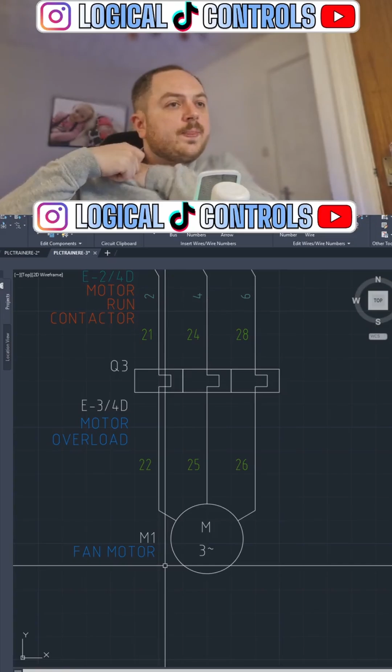AutoCAD Electrical, it is, mate, yes. CAD is the bane of me. It can be. Yeah, I feel your pain. It definitely can be.

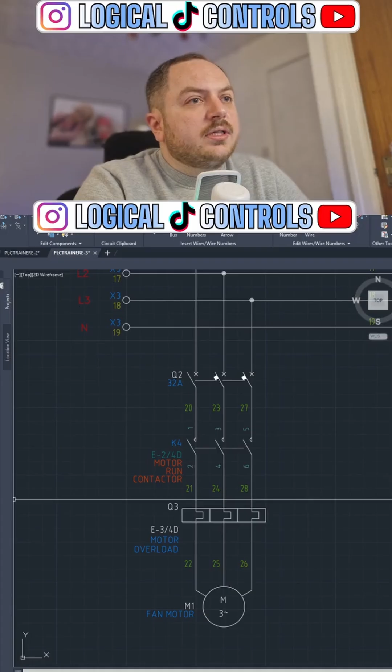"Now I'm switching to EPLAN." I hear a lot of guys are switching to EPLAN. I do hear that. Apparently it's pretty good. I imagine there's a bit of a steep learning curve.

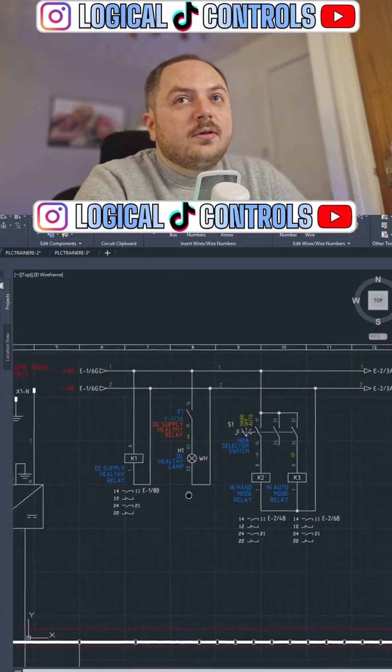Really appreciate that. "Somebody would have been doing what you're doing for us to watch you." I'm lost there, buddy. I'm lost. Explain it to me. Nice cut, GTA. Thank you, Tim. Welcome back, mate. Yeah, I look a little bit less homeless today, don't I? I've had a trim. I've had my beard trimmed back. I'm looking like I don't live on the streets anymore.

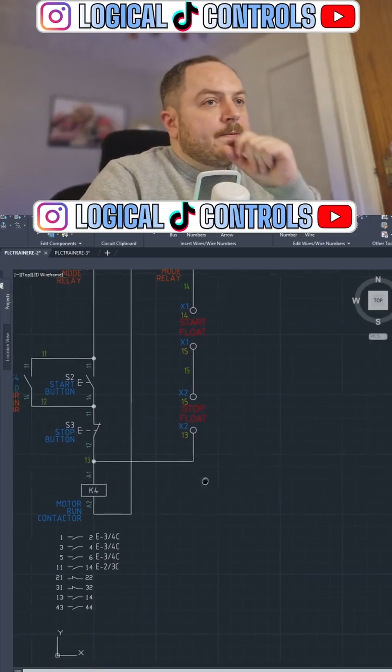"Where do you get those electric symbols on AutoCAD?" Well, you get it because it's AutoCAD Electrical. It's not just the generic AutoCAD. It comes with AutoCAD Electrical, a lot of the symbols. So I know in normal AutoCAD you have to make your own symbols. In AutoCAD Electrical, which is specific for doing schematics and that sort of thing, the symbols are already in a database for you.

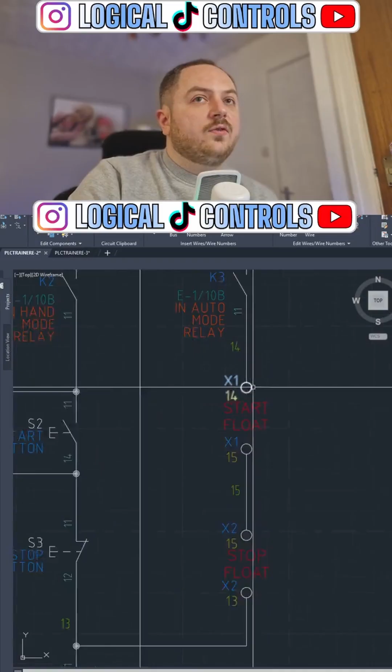The bits I don't like is doing cable schedules. So when you've got a control panel and you've got loads of terminals and stuff, obviously there needs to be, oh, hang on a sec, a cable's got to connect to those terminals across site.

You know what a cable schedule is. That's the bit I hate. That's the most boring part. I also don't really like doing control philosophies, which basically describes how the system is going to work in words and diagrams and stuff. I find all that a bit boring and tedious. But yeah, I like drawing circuits. I like drawing circuits. Oh, mechanical engineer.

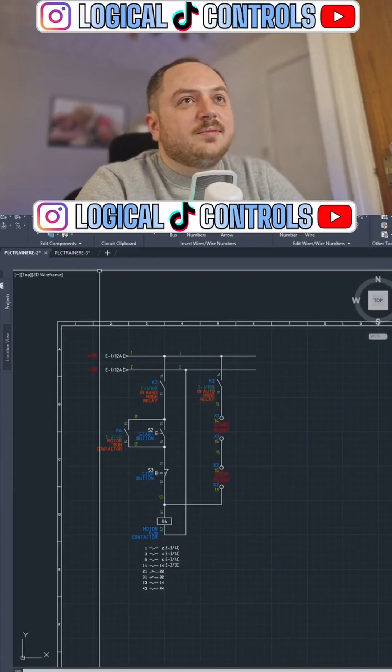Oh, like controls narrative, or sequence of... Yeah, sequence of operations it's sometimes called. I call it control philosophy. That's normally what I title the document. Or operations philosophy, something like that. Basically, the written description of how the system works. What's going to happen at what time. What I/O is in the panel. What else do I put in there? Any single line diagrams. It's admin. That's how I see it. I know it's not. I know it's necessary, but I find it admin. And yeah, boring.

Oh, it cuts my messages. Send it again, Peter. Piotr. Is CAD Electrical software available? So is your job doing design or just doing this in TikTok? Yeah, no, this isn't my job. I'm a part-time TikToker. No, I don't get paid even 2% enough for this to be my job.

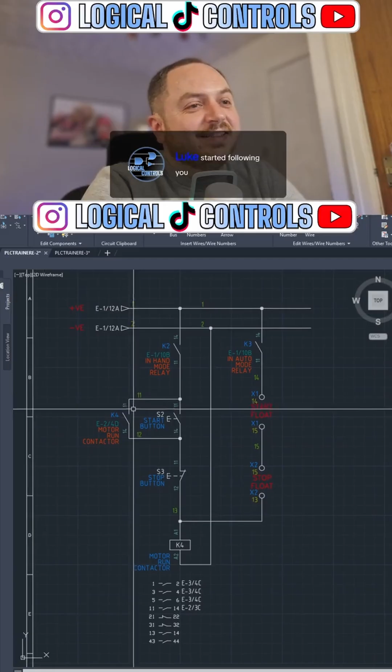Never had a chance to use them. I've only ever used AB and Siemens. Yeah, it's fair enough. AB and Siemens are the two most popular by far. Mitsubishi is actually not a very popular PLC these days. It was back in the day, but I feel like it works really well. I like the software. I like the hardware. Yeah, it's good.

I was looking at what they work at. You're right. They are very small. Them stickers. I can only see them when I hover over them. I might need to sort them stickers out.

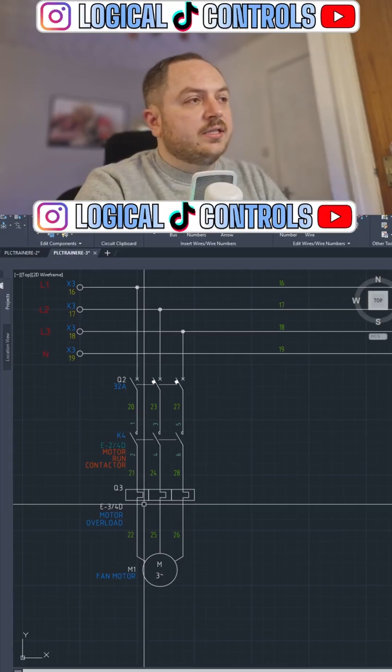Then I'll probably just get to work, start putting a circuit together. As I go through, I'll maybe talk with some colleagues, since a lot of the customers are the same, and ask have you spoken to this guy, did he say anything else, blah blah blah. I'll get my circuits done.

I'll send them off to the customer and say, here's the first draft. Have a look through, check if I'm missing anything you think I should have in it, check if there's anything in there that you don't want. Basically start the conversation by sending the drawings.

We'll then have a little bit of a back and forth. I'll maybe update my drawings a few times. Once I'm happy with the circuit side, I'll then do my GA, because the GA takes a bit longer, so you don't want to be messing around with that five times. I'll sort that out, and then if the customer's happy, they'll give me approval to build. I'll then order all the parts.

In the meantime of going backwards and forwards with the customer, I've put the part schedule together and stuff like that. They approve the drawings, I'll then order the parts. While the parts are on order, you know, things have a lead time - certain parts might take six weeks, certain parts might be there next week.

There's a bit of a time frame, and as that time frame's going on, I'll then work on the cable schedule, I'll work on the control philosophy, I'll work on any programming. I'll work on any documentation for the programming, because we might have a software manual, we might have some flow charts and stuff like that.

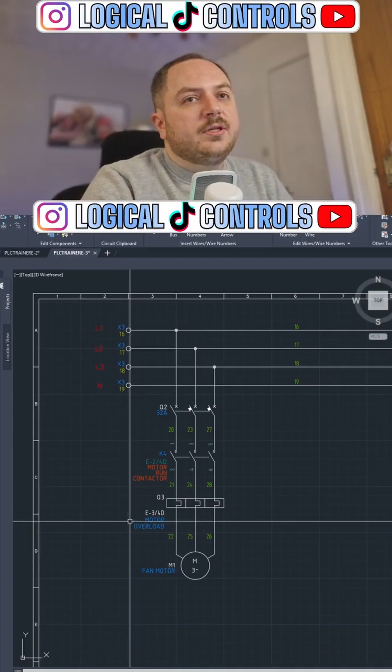And then during that time, the panel gets built. The panel gets electrically tested by a test engineer, so they'll check for its safety, check it works okay, check it's to spec essentially, the right parts are fitted and stuff like that. Then I'll come across into the workshop and I'll program the control panel, and then I'll functionally test it, once I'm happy that it's functionally correct to how it should be, to what we've sold.

I know this is a really long-winded answer. I do apologise.

Yeah, I'll program it, functionally test it. The customer might say we want to witness that test. I'll always pre-test it before the customer comes up - you don't want to be airing your dirty laundry, because inevitably you will have bugs in your program, that's just a thing. So I'll test it beforehand, before the customer comes, and then I'll get them to come in, witness the test, sign it off, ship it out.

Yeah, long-winded answer, I do apologise.

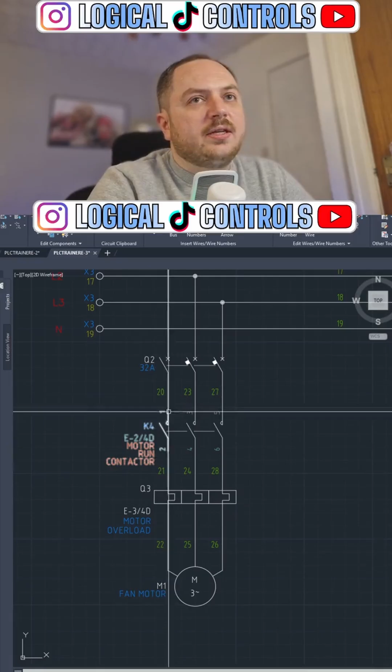Have I missed any? Don't know why, but them wire numbers are bothering me. Yeah, maybe it should be like 20, 21, 22. The way AutoCAD goes, I think you can actually change it, you can select it to do something different. I've got it set up so it goes vertically and then horizontally - it worked its way down first, then it went the other way. That's how it did it.